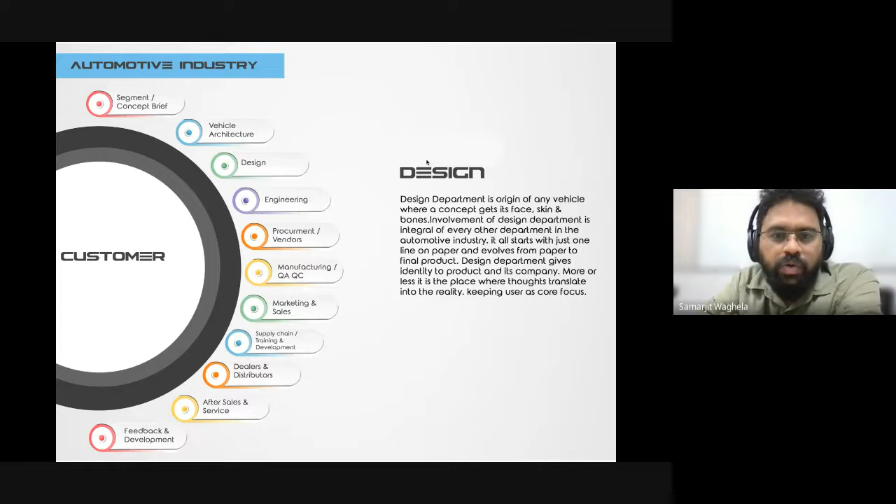Now, where is the design department placed in the automotive industry? We are focusing on automotive industry now. Let's say it is the origin of any vehicle, where a concept gets its face, skin, or bones. So more or less, it's the origin of all — it's the birthplace of a car.

Involvement of the design department is integral to every other department in the automotive industry, and it all starts with just a line on paper. We always start with a pen and paper, and I'll give you one demo also right now today, showing how this happens and what we do as a designer in the industry.

The design department gives identity to the product and its company. We all know that Toyota is a very sustainable, robust brand, and we know a certain type of design from it. We know how the Hyundai brand is. It's all because of the design of the car. We all know what Ferrari is, what a Lamborghini is — that design language is giving identity to that company. So that is the most important thing.

More or less, you can say it's a place where thought translates into reality. The company has some vision which is intangible, but designers and engineers come together and make that vision into reality. So that's what design is.

In the industry, department-wise, whenever we have an idea that we want to create some kind of bike or car or truck, that brief comes into picture. Then the vehicle architecture team comes into picture, and they figure out what kind of structure this vehicle will have, what kind of segment it will have, and what kind of wheelbase it will have.

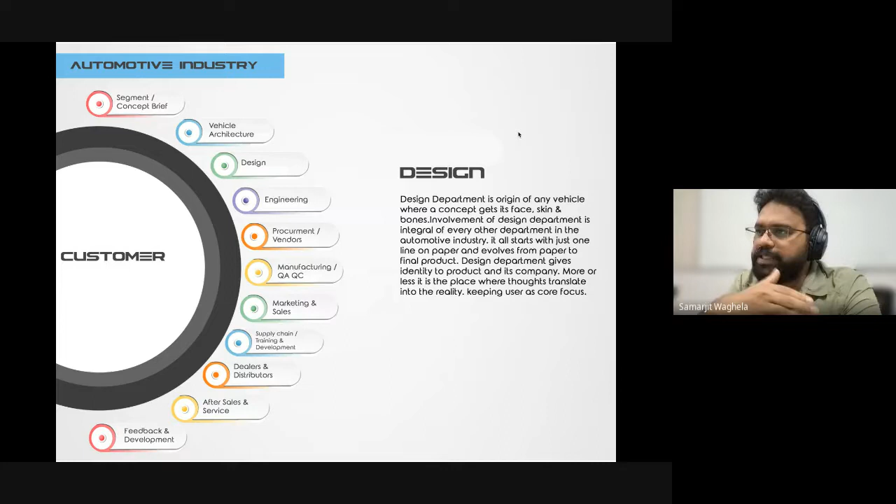So you can see that design comes into a very early stage. That's why I was saying it's the origin of a vehicle.

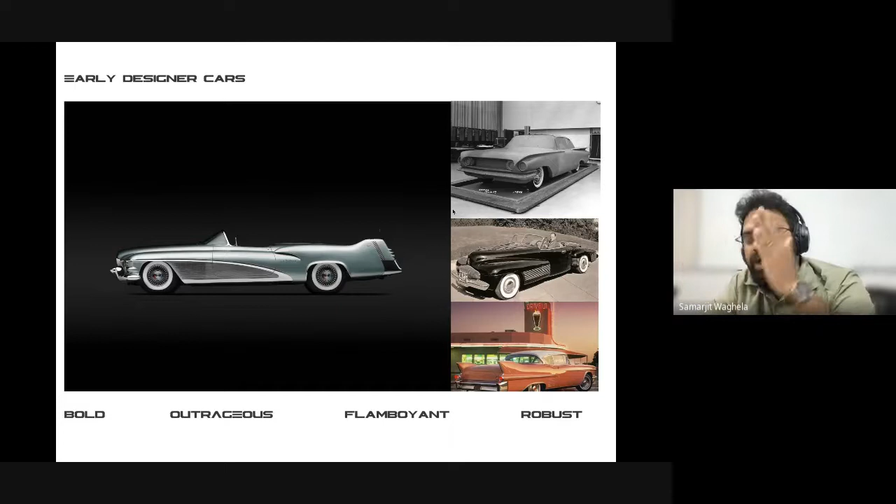So that is the case. And then we understood that these cars are making a statement for sure, but they are not making any sense. You don't need this much overhang after the wheels. Engineering-wise, it should be compact, it should be smart. So then the design department, or let's say design team across the globe, formulated a few rules.

The first is the silhouette. Now what do we mean by silhouette? It's the overall shape, the overall form factor of the car. I'll show that in the next slide.

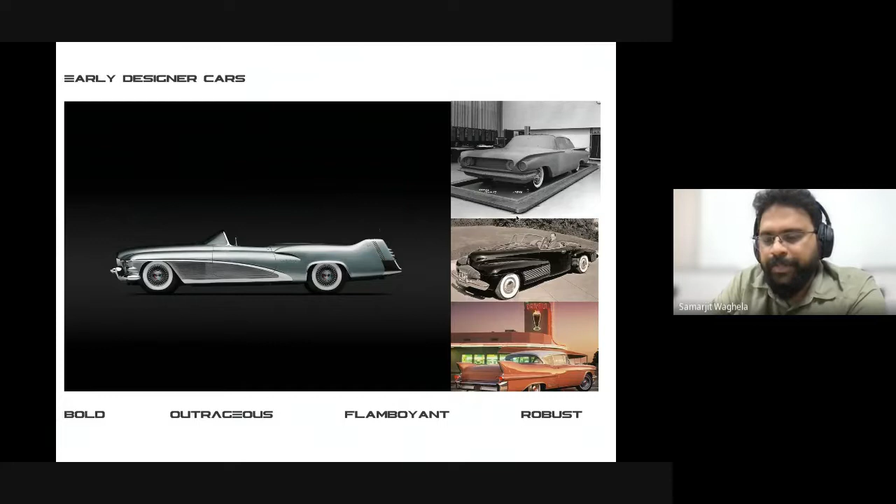Then the proportions of the car. In this earlier slide, you'll see each and every car is very out of proportion, meaning there is no visually good looking ratio of the vehicle. Everything is looking very chunky, everything is looking very flary in this case.

And then the details of a car. We always say that God lies in the details. The minute details of the car, like headlamp or tail lamp or other chrome grills, make each and every car beautiful. So these are the four things considered the most basic principles to understand automotive design.

So we'll talk further about the silhouette. As I said earlier, we as human beings always try to see the whole picture, be it a car or be it any other thing. So the first thing we notice, consciously or subconsciously, is the silhouette of a car. Silhouette means the outline of a car without noticing any details, or without noticing what kind of segment it is.

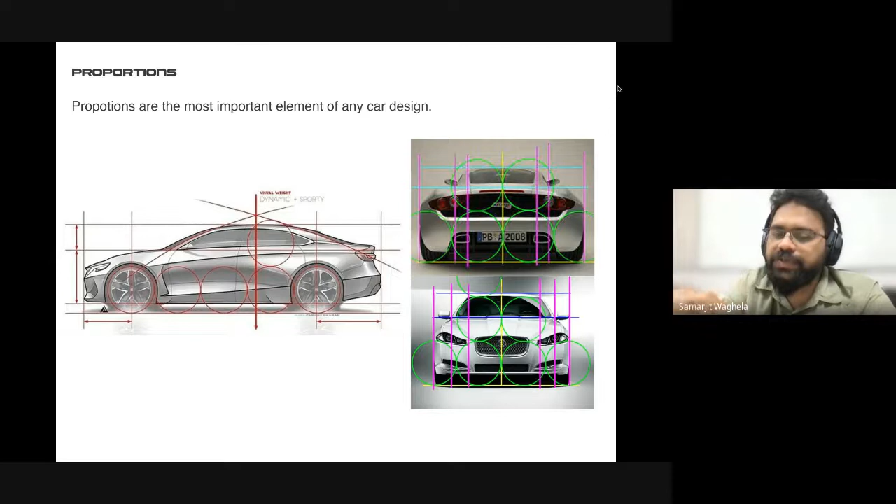So for us, wheel is very important if you want to define the proportion of a car. Then there's the stance of the car, which I was explaining earlier.

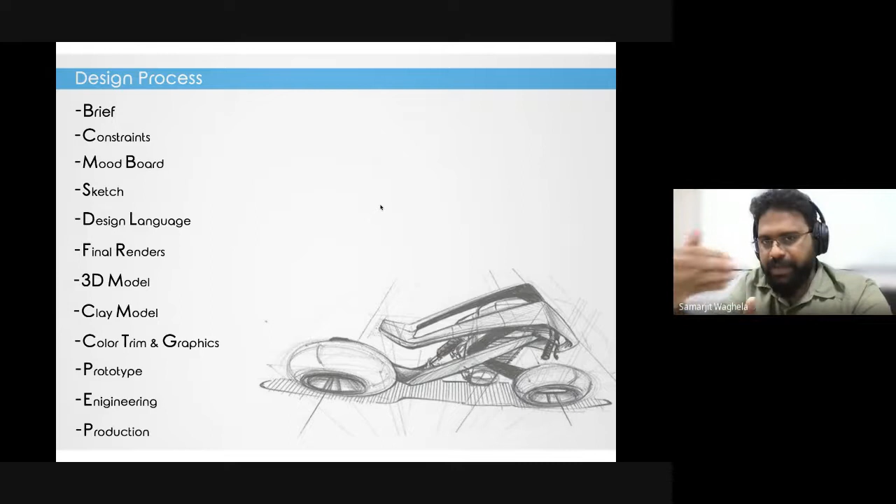Right now, this clay modeling is very important because it's the first step towards 1:1 scale, and that's where the designer understands his sketches in reality, how the surfaces are playing, whether it is matching the company's vision and designer's vision or not. So they refine that clay model.

And then another team comes into picture, which defines the color of the vehicle, what kind of material we should use on the seat and everything of that sort, and what kind of stickers or graphics it should have.

Once these things are freezed, the engineering team, design team, and color material teams go for prototyping. Prototyping is the first step towards a realistic production model, made out of metal, a proper functional prototype which they try to build. Then the engineering team refines it, and then production happens. So this is the complete design process which is followed right now in each and every automotive industry. Do you have any questions so far, or do you want me to go ahead?

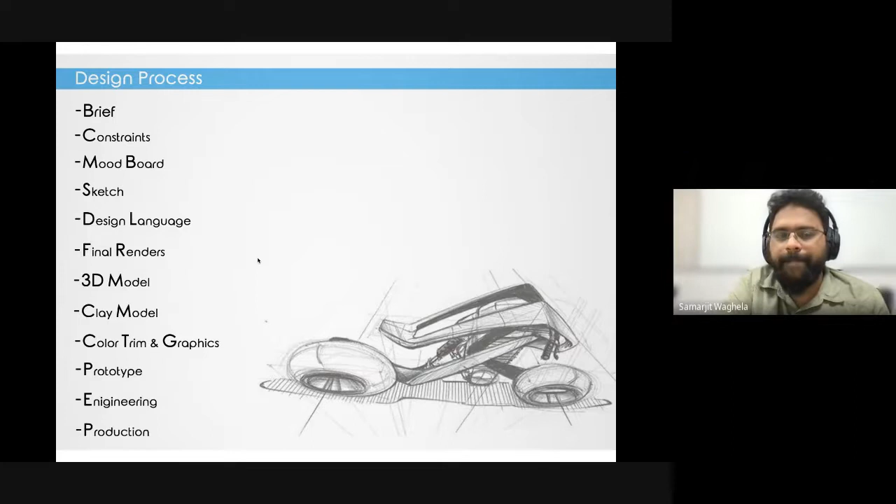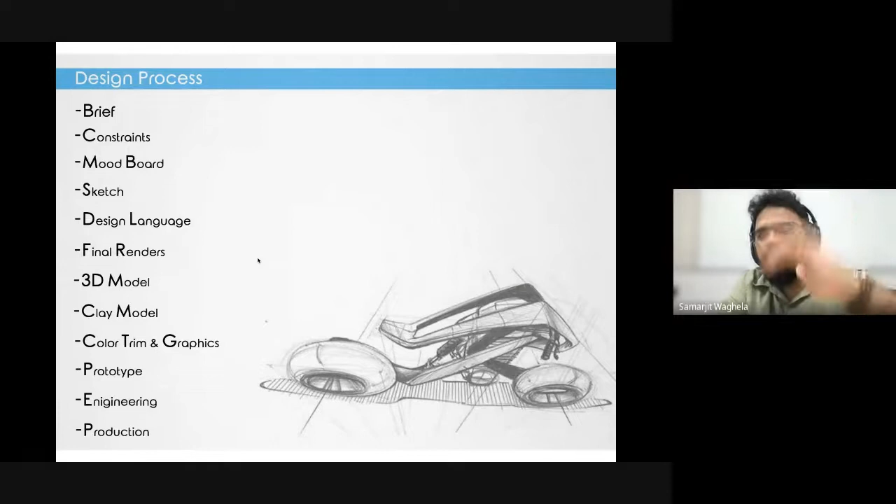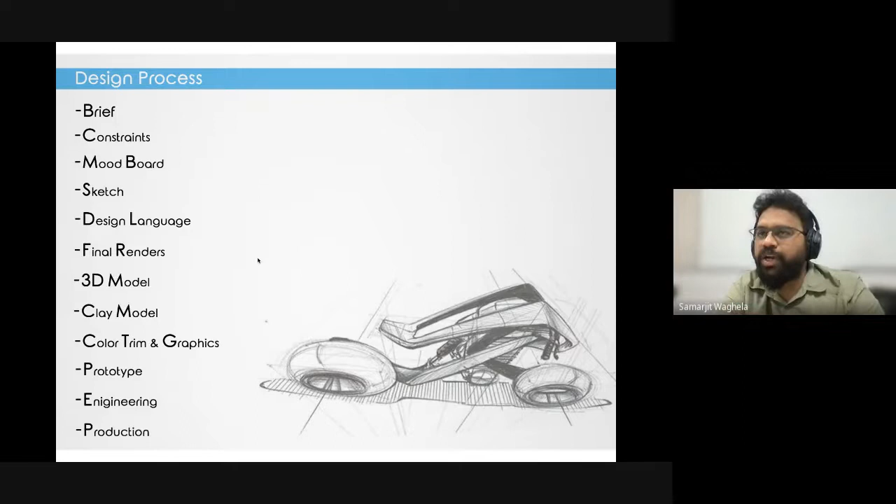Continue. Okay, so now we understood that the principles of design are placed, and now the design process is placed. So because of this modern approach, the evolution of automotive is coming into picture at a very rapid pace.

We see that in 1936 how this car was looking, and then till 1949 there is no significant change in the vehicle. But you see the car of 1975, this is the same brand and same model, and you see the car of the 2000s, it is again the same model. Now you see the car in 2025.

So these rules prescribed by the design community help designers create more interactive and more modern looking vehicles, according to the trends. This evolution is there in every product, and I'll say automotive evolution is the most interesting one, because it changes the form completely, and it's a moving thing on wheels. So that's why you have a great opportunity to come up with a lot of new changes.

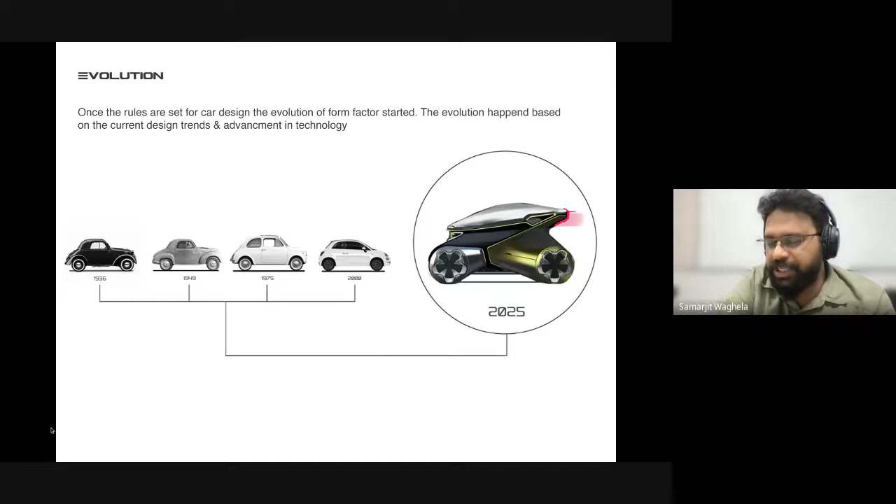So we can understand that's how this evolution is happening. The most iconic evolution I will say in India right now is the evolution of Tata Safari, which we all know. We all know how Tata Safari was looking when it was launched, and then how it got changed with time. The car was launched in the early 2000s, but within 20 years, you see how stylish a version they have created. And within these 20 years, they have introduced 5 models, out of which the 5th one is the best looking, I'll say.

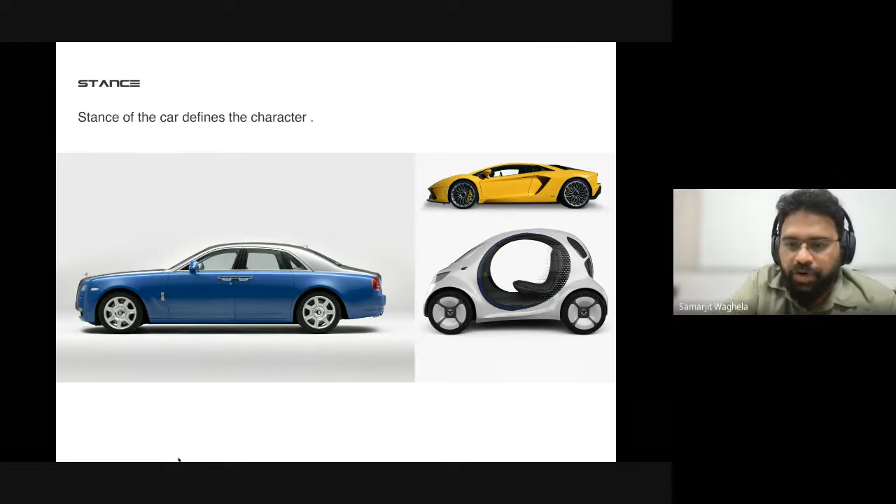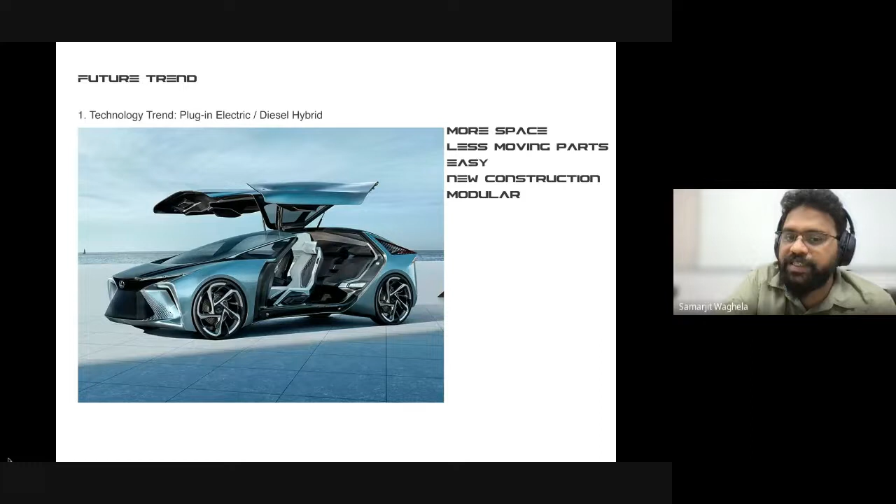That's how you achieve more space inside the car, and it also allows new types of construction. This photograph is not at all a conventional automotive design. Earlier, you'd see a front wheel, rear wheel, and then a B pillar and C pillar. That's the conventional form of automotive. But in this picture, the A pillar is very thin. Normally it's an engineering constraint that you can't create an A pillar with such a thin cross section, but it's possible now because you have the material and technology to support that strength. And there's no B pillar at all, just directly a C pillar landing at the rear wheel. The whole design language is changed, because EVs are allowing designers to create such bold looking cars. This is one trend which will drive the future of automotive design.

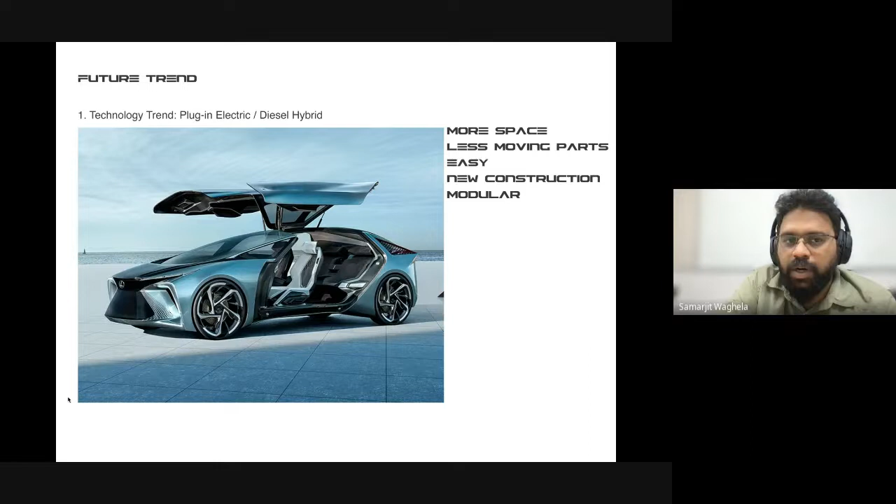And again, the daylight opening area, or the front windshield and side windows, is a very dramatic space there. This kind of thing is coming into picture, and this is a production version. These things are happening, and this is going to be a great mainstream future trend in coming years.

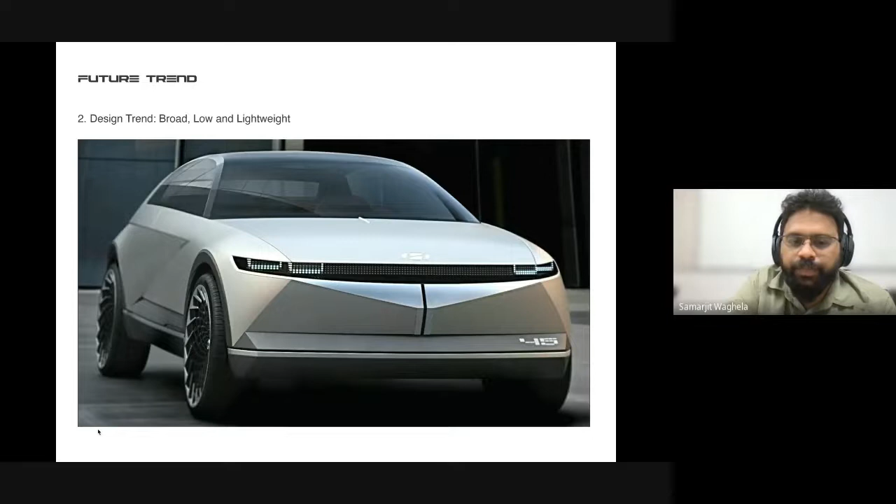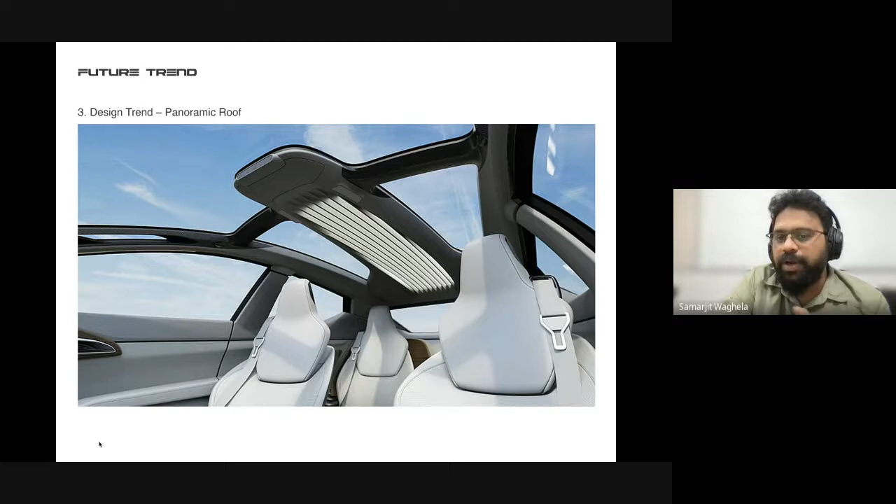Then we see the panoramic roof. Earlier we were very fascinated about small sunroofs in cars, but now we have the opportunity to create a panoramic roof. Nowadays cars are becoming a moving space - they don't consider it as a car, they consider it as a moving space. EVs have allowed that experiment, so designers are very excited about this and have started considering it as a space to design, taking inspiration from modern architecture. You might have seen those things in some futuristic buildings, so those things are coming into automotives now. This panoramic roof is going to be a very big trend in the coming future.

Then this kind of double doors - we all know how the front door should open and how the rear door should open, but those things are also changing because of EVs. You have more space inside the car, and to access that space you need wider open doors. So for that they've created such doors - we call it double door design.

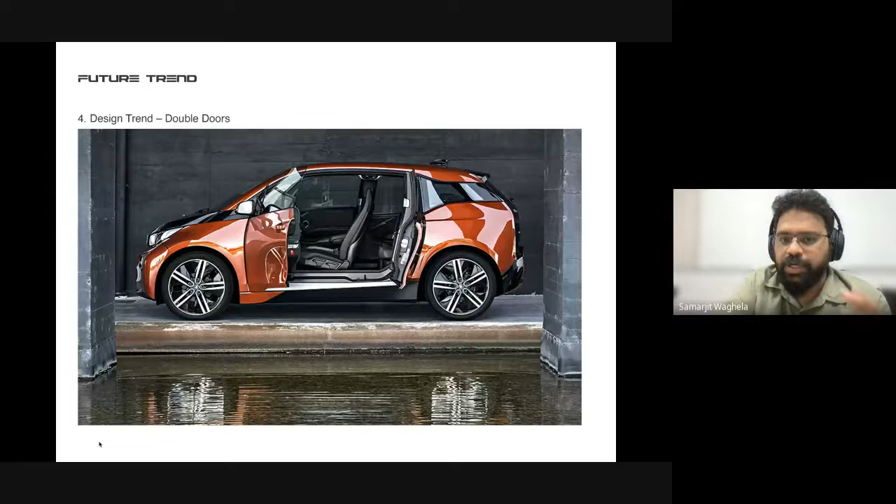And the headlights which I was mentioning earlier - LEDs are enough to act as a projector and illuminate enough light on the roads at night, to avoid any kind of mishappenings. We've evolved this headlight technology also. They look very sleek, very beautiful, and yet very efficient. This is also going to be a very big trend in the market.

Then regenerative braking - again with the help of EV, because of EV we are doing this. We try to save some power and regenerate power from the braking, then charge the batteries and use it for braking.

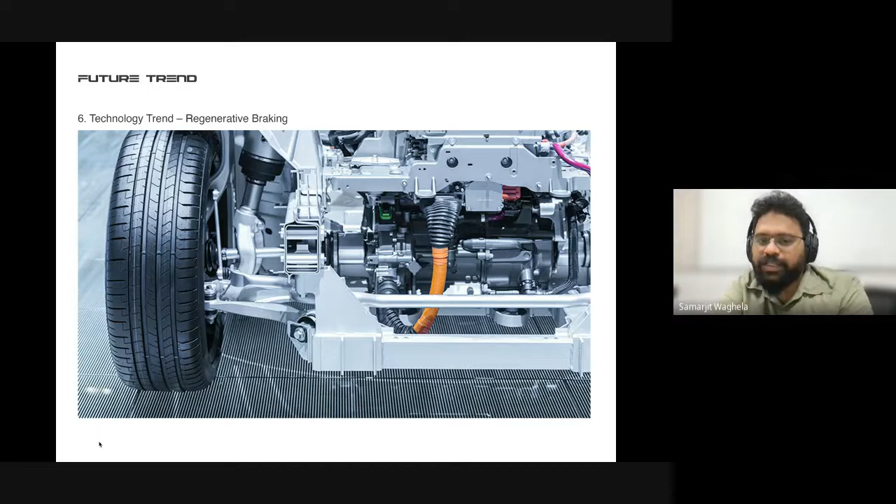So this regenerative braking is also going to be a mainstream concept. Currently it is in the experimental phase and it is not very viable in a few segments, but in coming days, as the technology progresses, this regenerative braking is going to be mainstream.

Now instead of side view mirrors or rear view mirrors, we try to install cameras, which give us a proper vision. You might have seen nowadays when we are taking reverse parking, there is a line produced by the system on our screen which directs us to steer the vehicle. Those kind of things are coming for the mirrors as well. So the mirror will not be the same as what we are seeing right now. In the coming future there will be just a camera in the front bumper, in the side view mirrors, or on the rear side of the car.

And this is a very interesting trend, this heads up display on the windshield. Because of this, there is no need for an instrument cluster to be placed inside the car. Now everything can be projected on the windshield, and it reduces the complexity, yet it gives you a very futuristic look, and it serves the purpose perfectly. So these are the things which are coming in the near future, or let's say in the distant future.

So this voice activated technology, now you can just talk to your car the same way we talk to our phone. So there will be interactive cars coming into the picture, where the car's artificial intelligence system will be able to understand your gesture, your posture, your mood, and then change the lighting inside the car. And those kinds of dramatic experiences are coming into reality. So those things are also there.

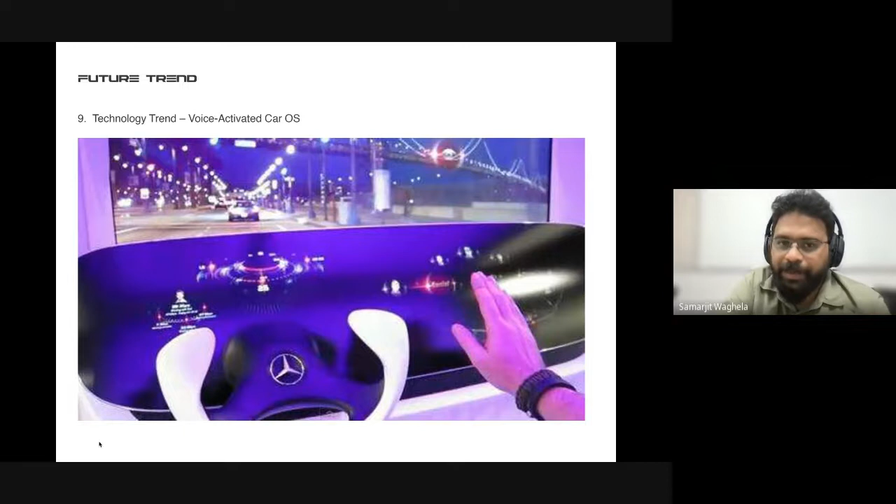And obviously we all know that autonomous cars are going to be the future. So that is also going to be a great mainstream trend in the future. People want to relax, and we all know Tesla and how their autonomous feature is working, and that's how this thing will become mainstream, and we'll achieve level 5 autonomy if everything goes okay. Obviously we are talking about the distant future here, like 20 or 30 years down the line, because it requires a lot of refinement in current technology.

So these are the 10 futuristic trends, and based on these trends I have tried to create a vehicle. It's a sketch of the vehicle, and I'll try to show you how automotive designers do the rendering in real time, how automotive designers give definition to a particular car.

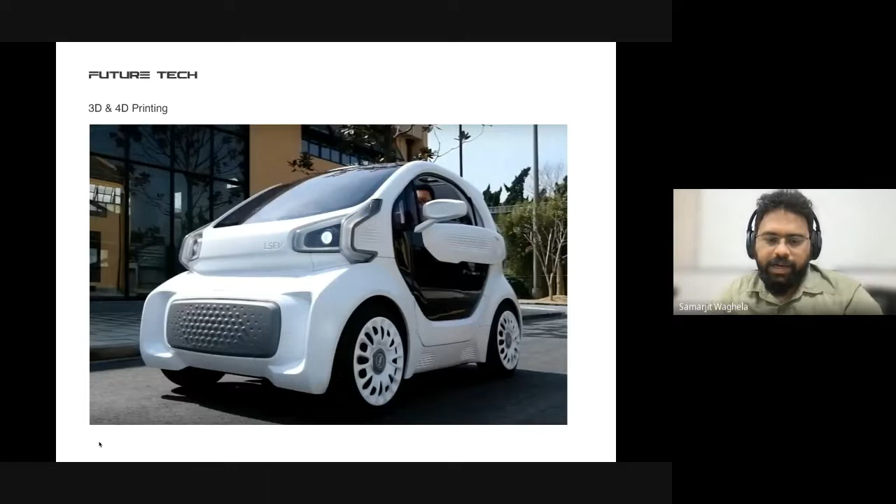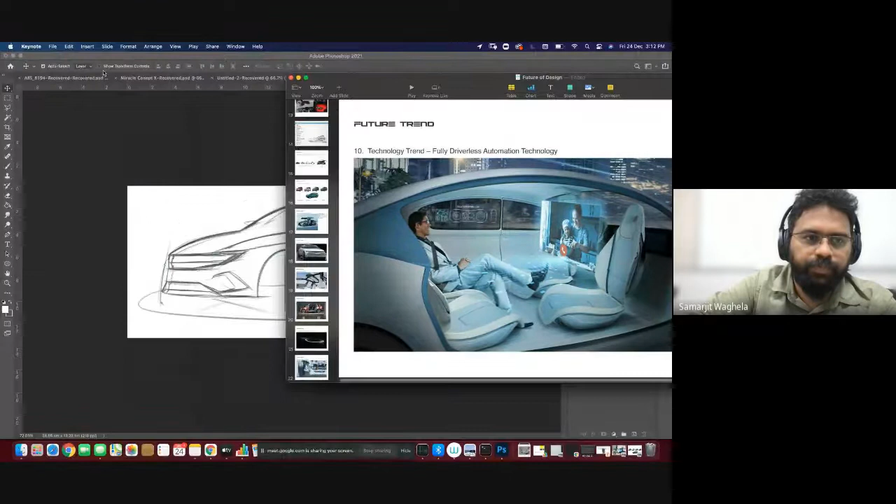So I'll connect my equipment here and try to give you a live demo of Photoshop render, like what a Photoshop render is and how we do it in the industry. Meanwhile, I'll try to connect the system, and you can ask me any questions if you have. Just give me 1 minute, I'll try to connect the system.

Okay, yes, my screen is still visible, right? Yes. Okay, can you see the sketch? Yes, yes, yes. Okay, fine.

So this is a sketch which I have prepared. I sketched it on paper, then I took it into Photoshop. This is the most standard software we use to convert our design into a proper refined design. I'll try to fill in some colors and show you how these things actually work. I've already prepared a few things so that I don't take a lot of your time, and then we can take it forward from that place, and you can stop me in between wherever you want, and I'll answer your questions if you have any.

So what I'm trying to do here is fill in the colors, and once I fill in the colors, I'll try to play with light and shadow. Whenever we start a Photoshop rendering, we always black out a few things, like the space of the tires, which we don't need as of now while we are rendering it. So you see here, that's how we black out the things. Now I can concentrate only on the remaining surfaces, so I'll put some base color there. This is the base color I want to go ahead with right now, or maybe I can change it, no problem. So let's say I'll use some other color, something light silver.

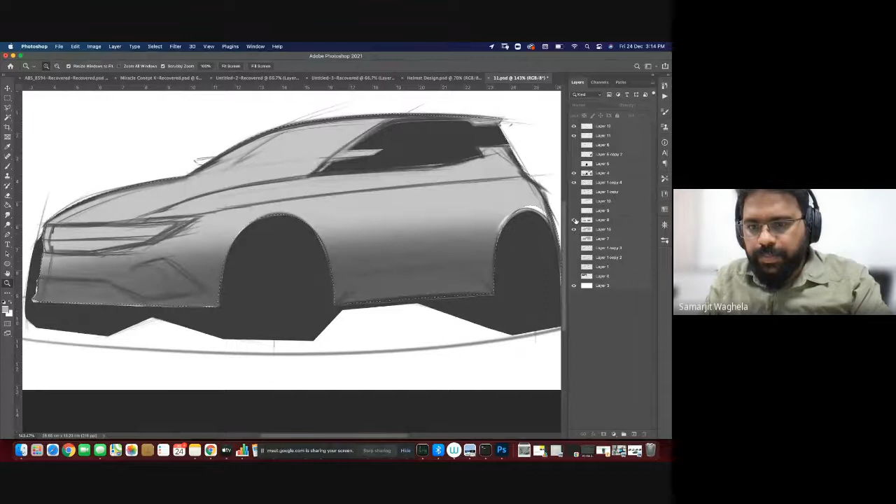Okay, so I'm assuming that light is coming from the top. So when the light is coming from the top, this area will be reflecting the maximum light, and this area will be reflecting the minimum light. That's why it is dark, and that's why this area will be the lightest. I'll make it lighter in some time. Right, so this is one thing.

Okay, now I'll try to see that how this wheel arc are placed. Let's see what we can do there.

So we use different kind of brush. This is the area above the wheel, which will again reflect the maximum light, so that's why I'm highlighting it. Let me try with some other brush.

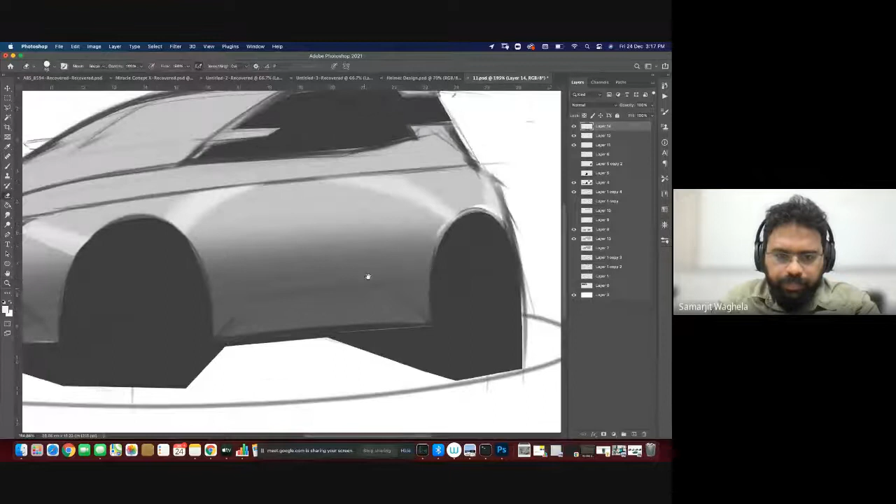Okay, since it's there, then we'll try to see. So whatever I'm doing right now, it is all matching with the design trend which I have just explained. As I said, there will be big surfaces in the vehicle, so that's what we are creating.

So this is another highlighted element which will reflect the light.

So Photoshop has a lot of layers, and we try to create each and every element on different layers. So that's what it is.

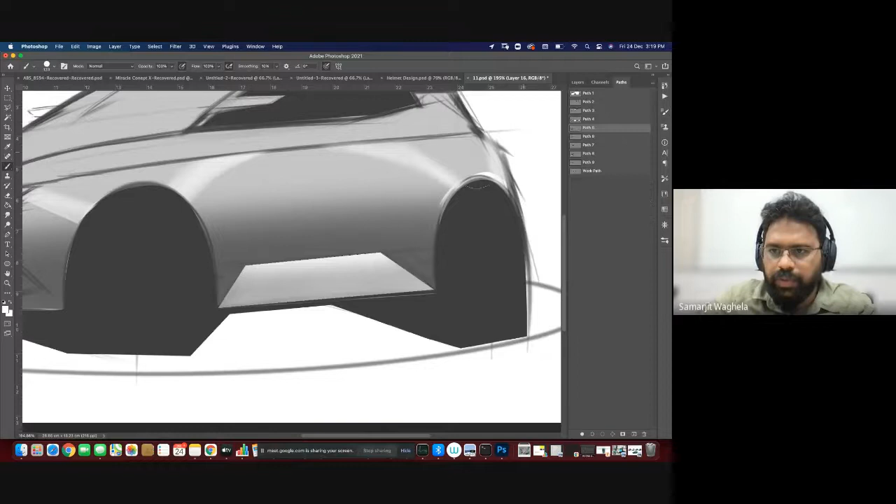Although we have a limitation of time, so I won't be able to do very detailed rendering here, but this will give you an idea that what sort of job designers do, right? Normally rendering takes weeks to finish one render, so it's a very detailed job, because based on it the engineering team will give us the opinion whether it's going to work or not, right?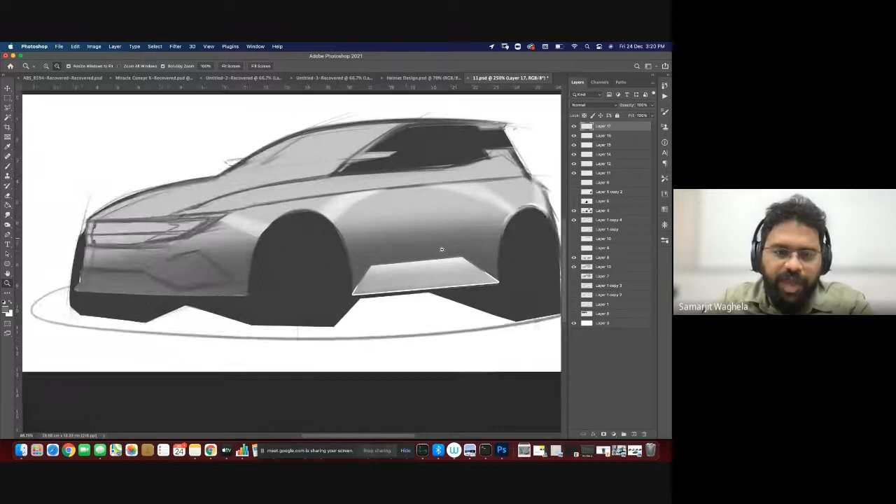So we have a lot of different kinds of brushes to play with. So sometimes we have a soft brush, sometimes we have a light brush, those kind of things. It's super fun, it's super fun.

So you can see there is a step here, right? And there will be light reflecting on the ground also, from the ground. So we call it a bounce light, and that bounce light will also come into the picture. Right now I'm concentrating just on the side profile. Once that is sorted, I'll go for the front fascia.

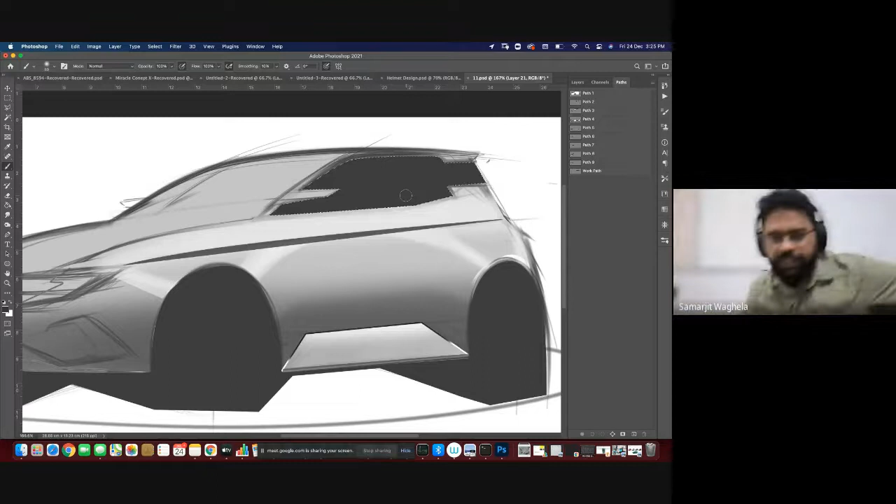For this windshield, we'll try to do something. Windshields, I mean the side windows, are always transparent, or let's say translucent. So then how does it look? I'll try to create something there.

So this is a B pillar which I'm creating right now. We can get an idea about what exactly.

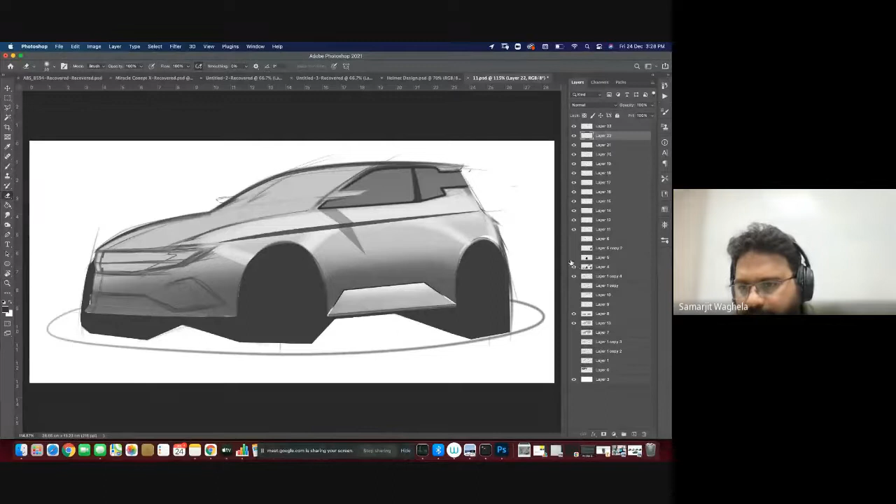Let's say we can see the wheels also. Wheels will also help us in defining the overall volume. So you see in this side profile, we have almost achieved how the light and shadow will come into the picture, and how the overall form factor will look.

So if I have to draw, let's say, if I have to understand the surface, I can do something like this, you can read these lines, right? So one is this, then this surface goes like this, then there is a depth, then this surface goes like this, then there is a depth again, right? So this kind of thing is very important.

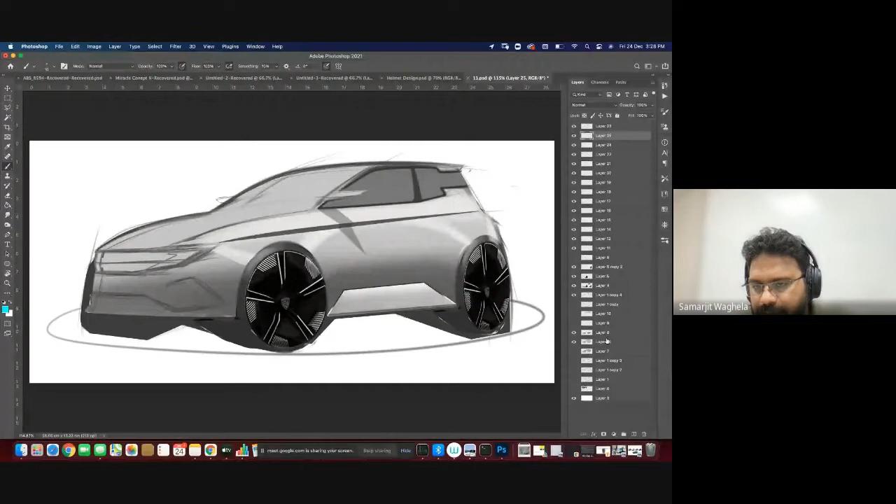So that's why we do this Photoshop rendering thing, right? This helps us see whether it's going in the right direction or not, right? And there's this thing, and there's this thing, and then there's this thing. And just so, this we call a contour line. So the contour line gives us an idea about each and everything.

Now we have this front fascia, okay, we'll see what we can do there. As I showed in the previous slides also, nowadays people prefer to have wider areas, wider front fascias.

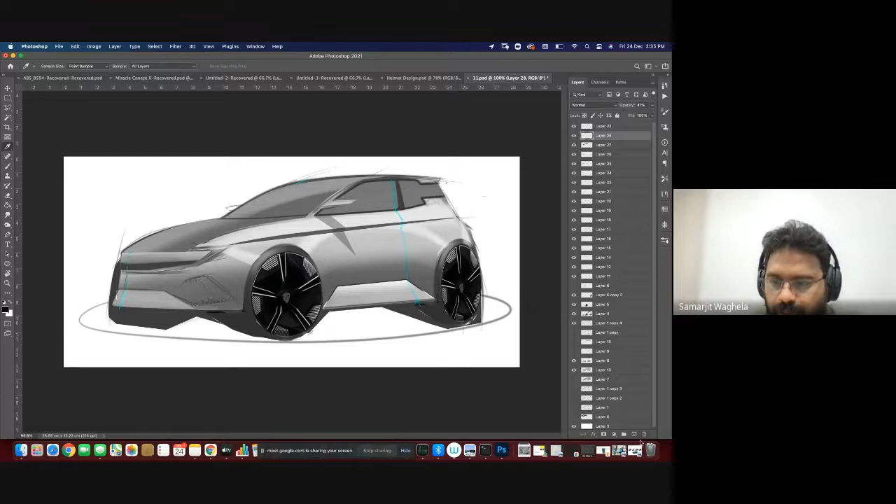There is a cavity there. This gives us an idea of what exactly we're talking about.

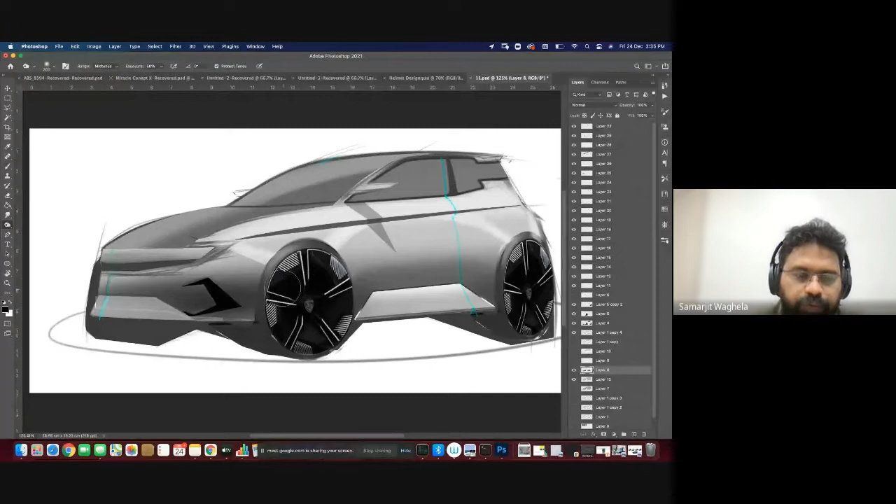Then one last element we'll create quickly, that is a headlight. As I said earlier, people prefer this futuristic headlights nowadays, so that's going to be a big trend. Let's see if you can understand that now.

I think we'll stop there. But just one last element, just wanted to give you a very brief idea of what automotive design is all about. Otherwise, it's going to take very long time to refine this render and make it presentable. This is just a very brief idea about what we do, right? So this is how it is.

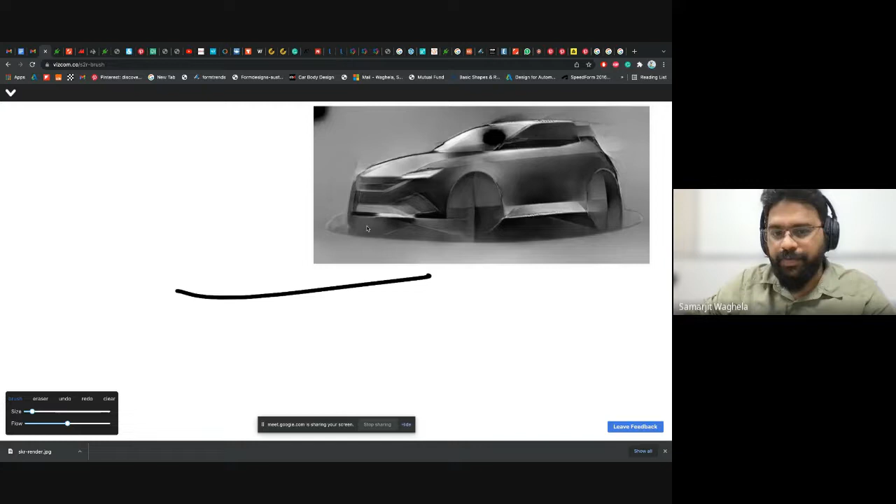And there is one more tool, in which we just have to create a few lines, and the system will itself start rendering on its own. I just have to give very basic inputs like this.

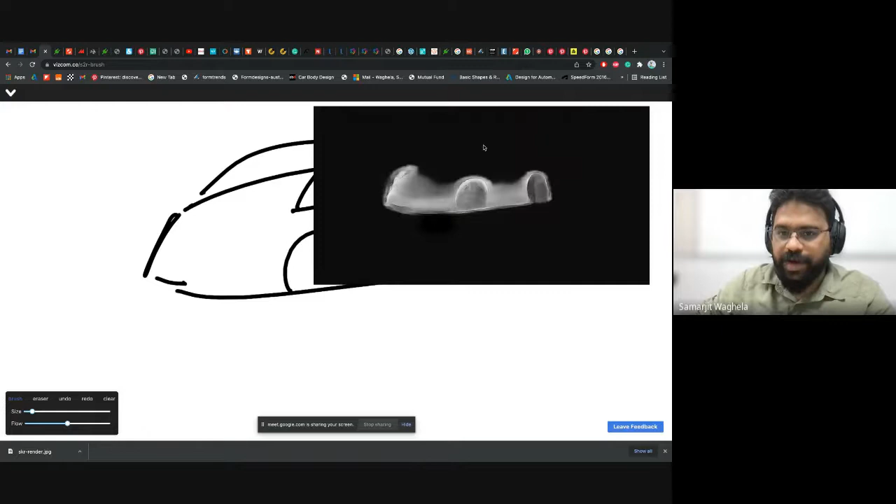Okay, you see it has created wheels and everything. This is going to be a big game changer for all the automotive designers, because they don't have to worry about the Photoshop render or anything. Although this is a very toyish looking car, you see on this side the system is generating the render on its own. It's very raw, still in a trial phase as of now, but you can see how things are changing, right?

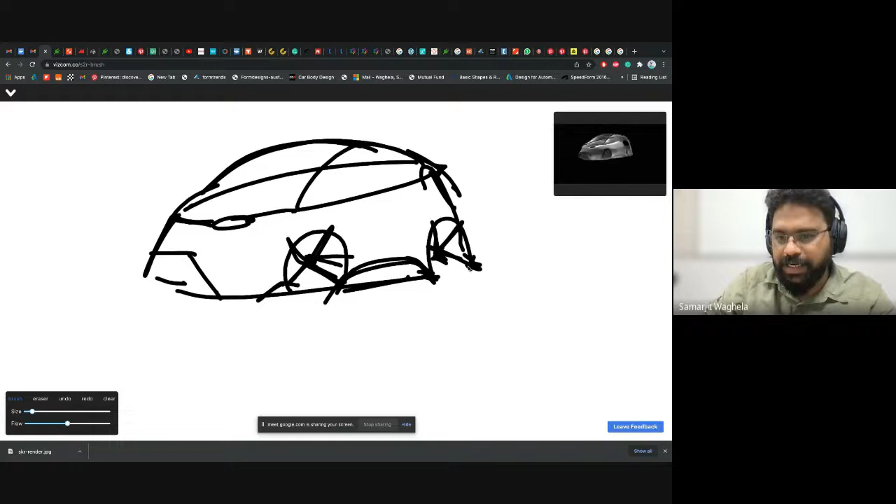Because I have a tool limitation now, so I can't sketch it like I do on normal pen and paper, but this is amazing stuff. This AI is helping us, and that's what the future of design is. You see here, it has created, it is changing on its own. So this is also one kind of fascinating stuff.

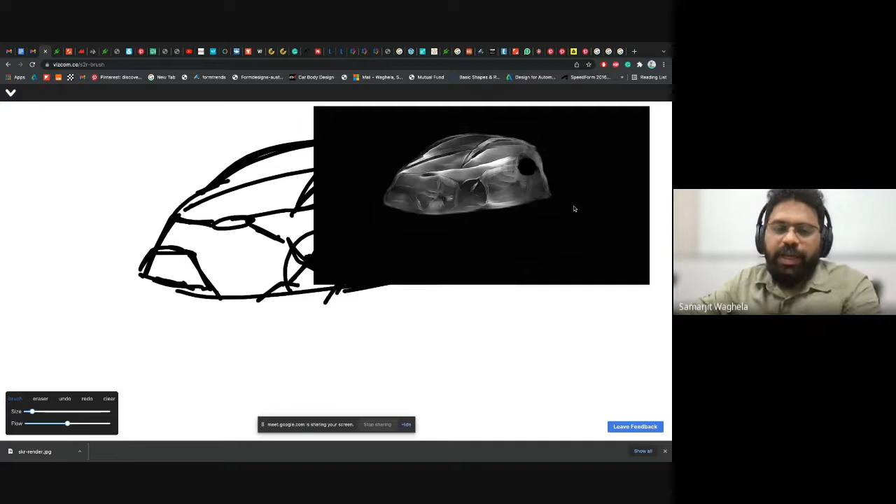Apart from this, augmented reality and virtual reality are also playing a huge role in designing right now, because with virtual reality, people can go to a space in a virtual space. Designers from different countries come together on the same platform and design together in that virtual space. I have tried that thing on my own, so I would like to show you that.

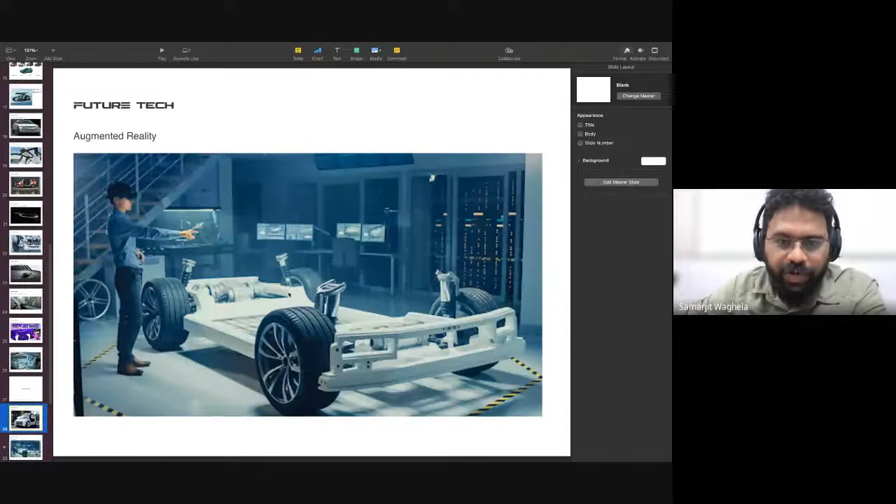3D printed car is going to be the next big thing, along with augmented and virtual reality. You see this thing, these are the sketches I have created by going into a virtual space. Okay, so you see that.

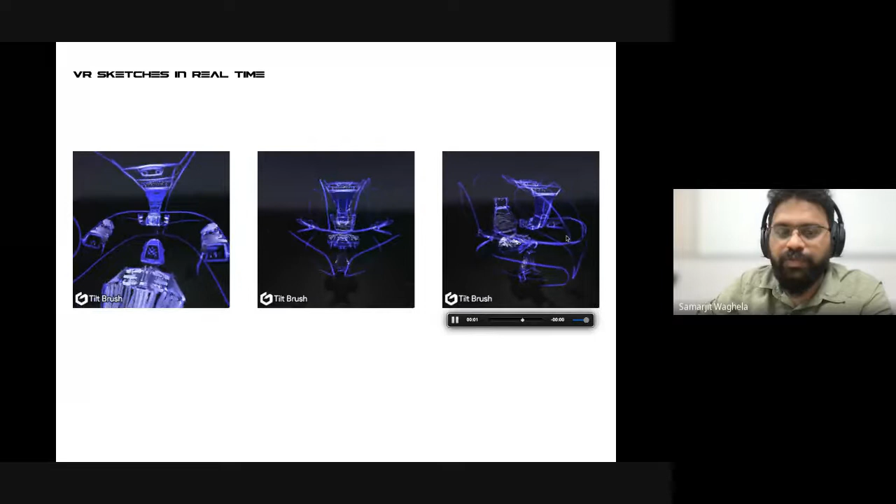So I can create a 3D sketch. This is the interior of a car, right? I can sketch it with a pen there, but not a normal pen, it's a virtual reality pen, and you can create a whole space, you can create the whole experience, right? So this is another big thing in the design world right now. There's no boundary for people who want to create something with people from another country. It is extremely possible, right? So this is also another exciting thing.

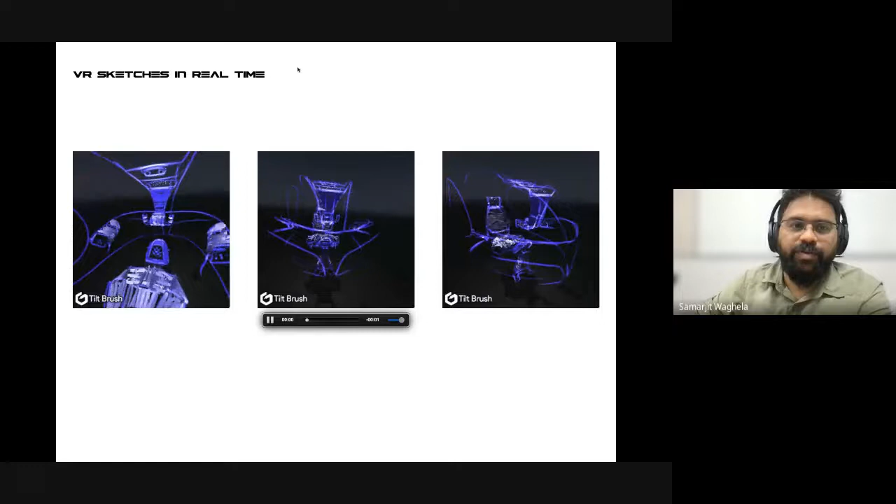These are the VR sketches in real time. That's there, and I have given you the AI demo already. So in a nutshell, even generative designing is helping us a lot to create more robust form factors. This is another example of it.

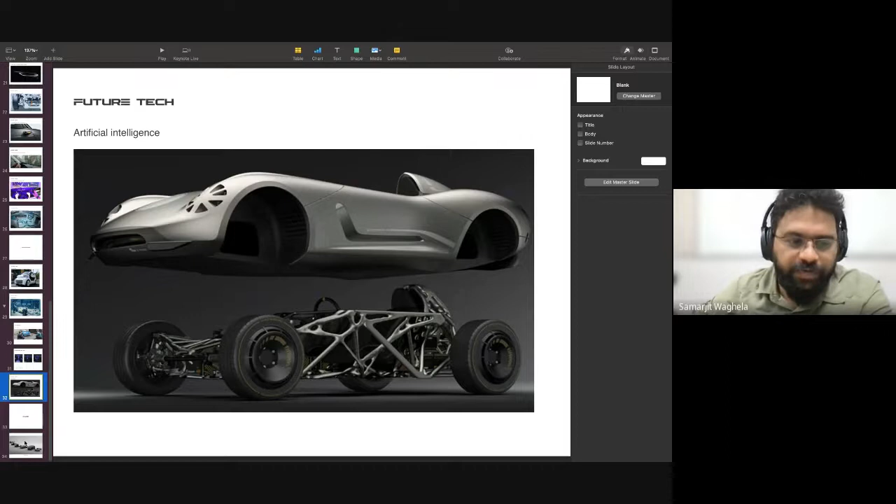And I think that's it from my side. If you have any other questions, just let me know, I'll be more than happy to answer.

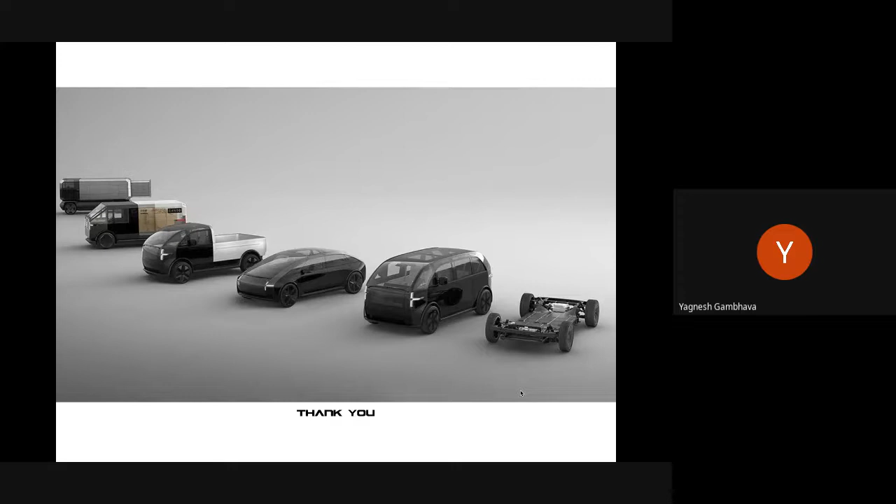It's always great, Yagnesh, you come back to the alma mater, as I said earlier. So whenever you need anything from my side, I'll be more than happy to help. No problems at all, thank you so much. Thank you, Sanjay sir. Thank you, Mahesh. Thank you, Yagnesh. I'll conclude the session then, I can leave the session. Is that okay? Yeah, fine. Okay, thank you guys, bye.

So I think it's not disconnected, Yagnesh. Can you disconnect it from your end? No. It's not disconnected yet, so maybe just give me a moment. You may, okay, yes, I understand. Yeah, thank you, thank you, bye.